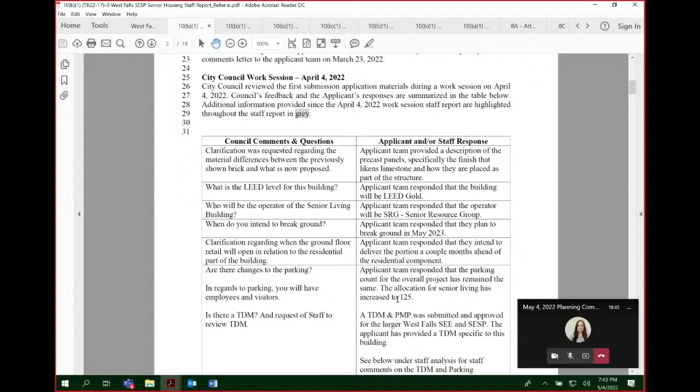There were some questions about parking, and the applicant team has provided a preliminary TDM, which is an attachment to the council staff report. I encourage you all to give that a look. Now I'm going to hop back over to the Planning Commission staff report. Background, including our staff analysis, is found in that council staff report, but I want to hop down to the application summary.

The site is Block D1, and it is part of the 9.78 acre West Falls Economic Development Project. The block is located at the northeast corner of the project at the intersection of West Falls Station Boulevard and Mustang Alley. For building and uses, we're looking at a mixed-use building with a maximum height of 15 stories and about 267,900 square feet comprised of the following uses.

260,000 gross square feet of residential use and a maximum of 212 homes, broken down into 22 memory care studio units, 58 assisted living units, and 132 independent living units.

And then we have 7,900 gross square feet of ground floor retail. The ground floor will include 2 retail bays, a restaurant, a kitchen, and amenity spaces. Floors 2 through 15 is the residential use, which includes amenity spaces and building staff offices.

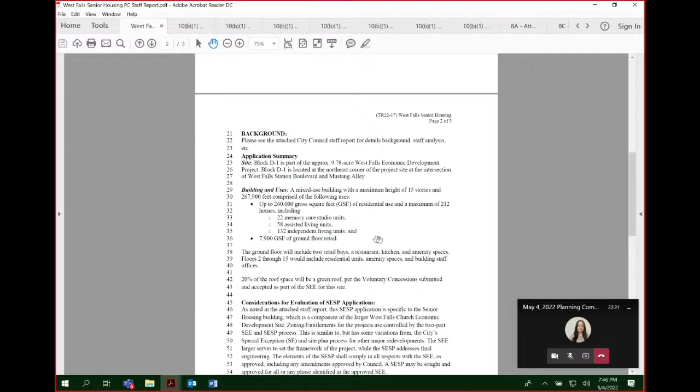On line 66 of the staff report, the SESP process is intended to result in approval based on recommendations from staff and boards and commissions, specifically Planning Commission, and considerations used in approving site plans, which includes required application elements as specified and required considerations as specified in section 48-1141. SESP applications are considered against the special exception criteria.

This is noted in the council staff report. On line 73, we have our guiding documents that staff uses to evaluate special exceptions and site plans. Those are the comprehensive plan, our small area plans, our design guidelines, our streetscape standards, the zoning ordinance itself, and other applicable city codes.

Also want to note fiscal impact. The FIA is going to be carried over from the approved SE application, as the change in unit count and mix hasn't really adversely affected it.

I want to touch on our timing really quick. Right now we're with you guys on May 4th having a work session. We intend to come back for final action, our public hearing and action, on June 1st. In between, we'll be going to the AAB on May 11th and the UFC on May 19th. The EDA just saw the application last night. We're looking for a city council second reading and final action in early August, specifically August 8th.

Perkins Eastman is our architect who will be speaking after I tee up the application and make a few high-level remarks. We also have Trammell Crow, who is the developer of the senior housing building, and Walter L. Phillips on the line as well, our civil engineers. If you can advance to the next slide, please.

So as Emily had mentioned in her staff report, the senior housing building is located on Block D1 of the West Falls Development Project. This first came before the city for approval in 2019, and there was an amendment, as she noted, in 2021.

Those approvals established very high-level development guidance for this block and for the remainder of the development, setting minimum and maximum ranges for criteria like density, building height, use, and setting out the street grid, etc. With respect to building D1, there was conceptual approval of the development statistics, but no actual architectural design approved, no detailed design drawings associated with the building.

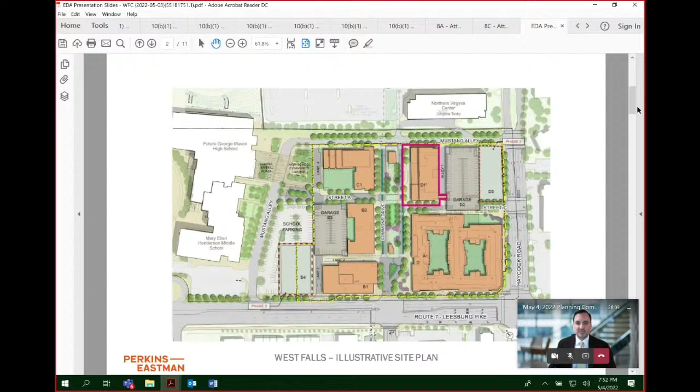So that is the application currently before the city that we're advancing at this time, and an SESP application which fills in those gaps and provides information about the actual building design. Next slide, please.

This chart shows where we started and where we are today. I won't go through every single number here; this is more for everyone's reference. But generally on the far left, you can see the minimum and maximum ranges established for the senior housing building. In the center column, you can see the most recent conceptual approval from August 2021, and the building that was sort of approved on paper, but without an actual design to go with it.

And finally, on the far right, you see the current development statistics. These have continued to fluctuate a little bit as we move through the process, so what you're looking at is more of a snapshot in time. We do anticipate final development statistics ready for our upcoming resubmission, so that when we come back before you for your action hearing, you'll have the final design and these statistics will be more locked in.

In a moment, I'll turn it over to Perkins Eastman to show you the building and the final design. But I just want to note that what you'll be seeing is primarily architectural images, and you won't be seeing too much about the streetscape, ground plane, or public realm. The reason for that is these elements of the approved entitlement really haven't changed from the original 2019 approval and the subsequent 2021 amendment.

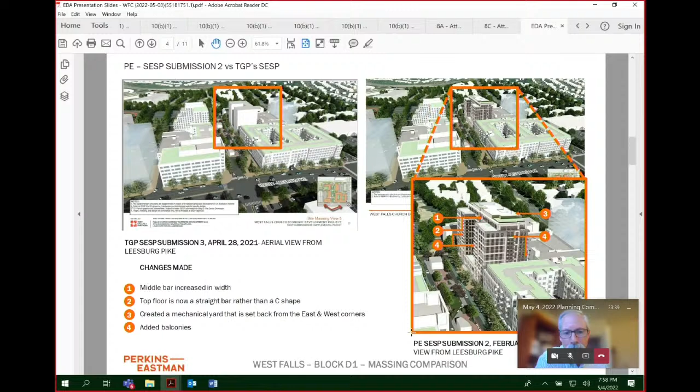The next slide essentially looks at the building from the other direction. This is basically from the Virginia Tech building across Mustang Alley, looking up Commons Drive at the other side of our building, and really just pointing out the same four changes to the building as they compare to the original SEE. Very consistent with the previous approval and very consistent with the scale of the condo building across the street. Next slide, please.

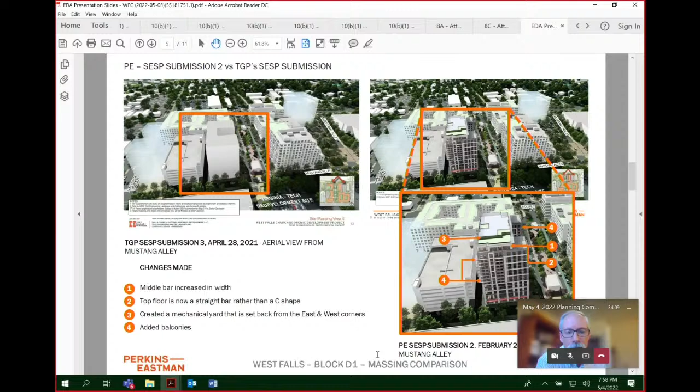When we first came to the commission asking for approval of an additional 35,000 square feet, the building we proposed is shown on the left. Although the mass of it is very similar to what we're talking about today, the materiality was different. We had conceived of this building as a red brick building with buff-colored brick, and that was the imagery we proposed. As we went through the development of the design and started looking at other issues such as construction durations and maintenance, we determined that we would prefer to make the facades of the building out of architectural precast, for a number of reasons.

We think it's actually a more handsome building. The precast panels are large in scale and they're hoisted up and welded in place very quickly. That's going to allow us to erect this building much quicker than if we hand set thousands of brick on scaffolding. That's a benefit to the neighborhood because our construction operations will be shortened, and the noise and disruption will be minimized.

We also made a change of color, mainly because architectural precast really looks better in earth tones and grays than it does in reds and browns. So the building on the right, which is where we are today, is an architectural precast building in two shades of gray, as opposed to a brick building in red and buff.

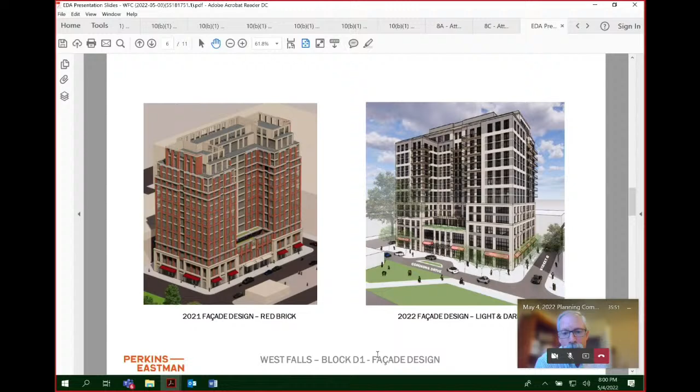Next slide, please. When we had our work session with city staff about 10 days ago, one of the things they asked us to do was add other perspective images showing the building from other locations. So this shows the building in its precast form, in the gray colors, from both ends of the site, and you can start to catch what we refer to as the rear facade, the facade that backs up to the alley and faces the parking garage. You can see that in sort of acute form here.

The final development of the building is represented in the next images. So here you can see the building fully rendered with all the shade and shadow and depth that we intend to provide.

The two little biscuits, as I call them, in the middle are actual material samples of the precast. They give you an idea of the fineness of the texture — it's almost like limestone. There are two colors of gray, and two planes to the building as well. The light colored plane sits forward and the dark colored plane sits back, and that gives a lot of shade, shadow, depth, and movement to the facades.

Then you have the balconies, surrounded by glass railings, which provide a third material that gives the building a horizontal read. We've broken the verticality of the building up into multi-floor chunks — you can see that especially at the base of the building, and in the independent living units where the balconies are, you can see the two-story read. All of that is intended to bring the perceived height of the building down to a more human scale.

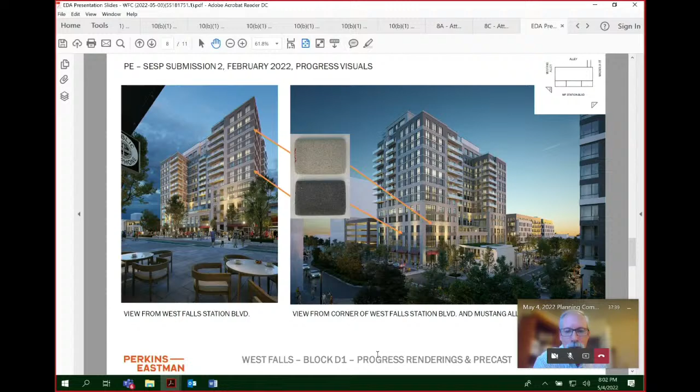In order to understand how the building functions, the next couple slides have floor plans that I'll walk you through quickly. Starting at the ground level, where one would enter the building — the lower left diagram — we enter right in the center on the axis of the building. It's a very symmetrical building. Our entrance, where the yellow is, is the front door to the independent living, senior living building.

You come in there, and everything to the left is part of the senior living program. The pink colors are living rooms and amenity spaces, with a large restaurant on the end of the building facing Mustang Alley. In the back, on the alley, the gray spaces are the kitchen, and the purplish areas are the shared loading dock and shared trash room. On the right side of the page, the aqua or blue-colored spaces are the retail spaces, which could be subdivided into one, two, or three different spaces. That's what happens on the ground floor.

Going down to the basement — the top diagram, which is all gray and yellow — down there we have a variety of service spaces: utility entrance rooms for electric, water, fire, gas, and telephone. All those service rooms are down there, as well as bike storage for both retail and senior living use, and staff spaces as well. So this is all service and support to the retail and to the senior living building.

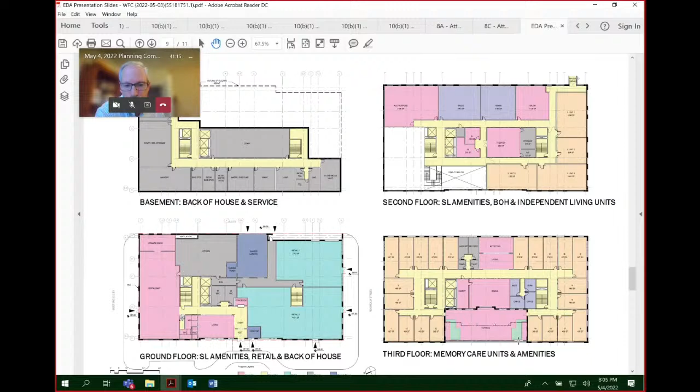Going upstairs now, we'll go to the next slide. Now we enter the realm of assisted living. On the fourth floor—the upper left diagram—we have our first floor of assisted living. The pink spaces are all the amenity spaces supporting this floor as well as the 5th and 6th floors, which are primarily assisted living residential units. The gray and purple are back-of-house and support spaces.

We also have a small balcony terrace that runs across the top of the memory care terrace below, accessible from the assisted living dining room, available as an outdoor space for assisted living residents. The units on this floor, as well as the fifth and sixth floors, are a combination of studio and one-bedroom units. On the fifth and sixth floors, which are identical, the larger units are one-bedrooms and the smaller ones are studios.

As we move further up the building, this is independent living, shown in the top right diagram. We have 16 units per floor, many with balconies, all one-bedroom and two-bedroom units. All floors are identical—there are 8 of them—and then finally we cap the building with our penthouse level, the 15th floor, which is another amenity space.

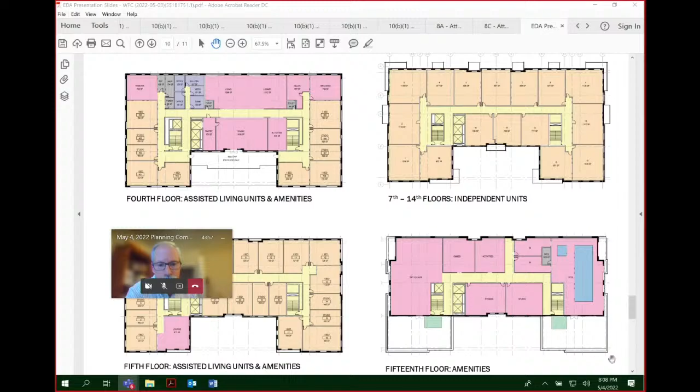On top of the penthouse level, we have our mechanical yard and green roof—a traditional vegetated roof—all of which works to satisfy the stormwater management requirements for the building. The last page has some tabulations, which have all been restated on the first page that Mr. Allman talked about, so there's nothing here we really need to cover. That's the architectural design of our project.

Okay, I guess before we move on to other topics, are there any questions on the architectural design? Any questions or comments from commissioners on that aspect? Ms. Coleman, I see your hand popped up.

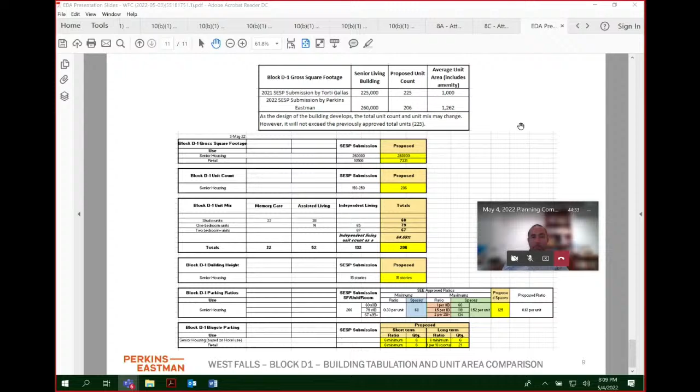Thank you. I did have one question about the bridge to the garage. I was wondering if you could talk a little bit about that and how you chose where to locate it, and where it is located on the garage levels and how that relates to where the parking is.

It is in a location where it ties to a landing and the elevator core in the garage, so it's a quick trip to get from your parking space down the elevator and across the bridge into the 2nd floor of our building.

And just to further that, most of the senior living parking spaces are clustered around that landing. There are some on a different level, which is where the elevator comes in.

Got it. I thought they might be on the 2 levels above where the bridge was located. I was curious about, it's not very close to the elevators. I was just curious about why it was sort of at that end of the building, on the right side of the building, I guess I'll say.

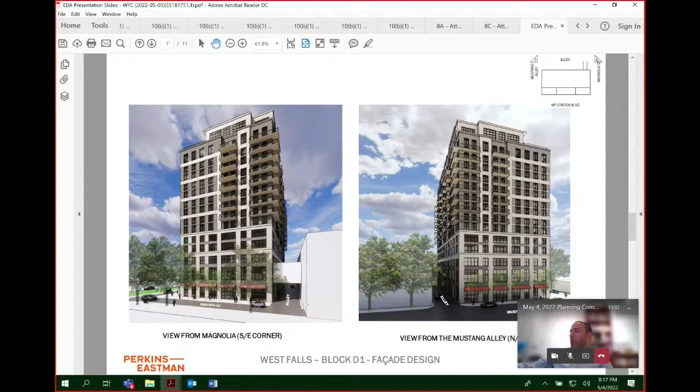They do, sir. There's a large rooftop terrace, about 30 by 70, 30 by 80, right there. It's all outdoors and secured so there's no chance of them falling over. Right, I mean for those folks, having some outdoor space that they can safely get outside to is important and good.

I also see - so would there be the ability for them to walk around a loop of the floor there too, potentially? I know in some other memory care type settings, they've designed outdoor but contained walking paths that give them the ability to move around and walk, but it seems like perhaps there's some of that here. I know there must be facilities like this in more dense urban places - there has to be, and it's good that there is. But I was curious how you deal with that part of it.

Well, we do have the loops, sir - both the yellow corridor network loops, and it loops also into the exterior courtyard. We haven't shown a detailed design for the exterior courtyard, but it will also have a loop as well. I'll also say that a building just like this is really where we see a lot of the market going into walkable neighborhoods in an urban context, and a stacked building like this is becoming more and more common in many, many cities across the country.

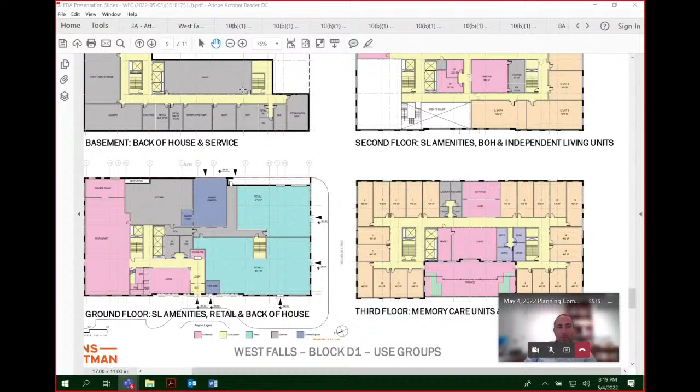Thank you. All right, any other questions for the architectural elements here? I guess I'm not seeing that, so I don't know if the applicant was going to discuss any other aspects. I know city staff commented on some other issues related to transportation and environmental issues. I don't know if there was anyone else who was going to hit on those aspects, or if we just want to open it up to commissioners to have at it on other topics.

Mr. Stevens? Yeah, I can go ahead if it's appropriate. I did have some comments on one fiscal item, but then the rest of it's, I guess, on the environmental side.

Before I get into the fiscal thing, I'll just add my 2 cents that I liked the change from the brick to the architectural precast. It does give it a more modern look, and I think it fits in nicely with the condo building across. I also like the addition of the balconies.

So thank you for that. First question has to do with the fiscal side of this, and Mr. Fuller, you may have enough institutional memory to recall this: going back to when the city approved the Kensington, another senior care facility, there was a lot of discussion about a supplemental payment, a way to come up with a value for the building. The thought was you couldn't rely on a traditional income approach, so they had a basket of about 10 properties to develop a basis for the valuation. Now, it may not be relevant here because there's an overall comprehensive agreement that takes care of the fiscal aspect, but I'm curious, Gary, whether you recall that discussion on the Kensington, and was there any carryover to this facility since it's a similar type in concept?

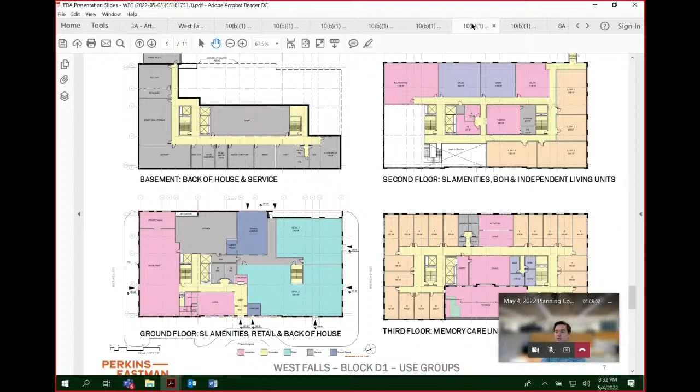The reason we were comfortable with the difference between 125 and 150 spaces is that this is a very metro-accessible site, and we anticipate a number of our lower wage workers, servers, and some care staff will be taking metro to and from the project every day. I think a TDM plan in this location will be far more effective than at the Kensington. The Kensington's not too far from metro, but that wouldn't be my preferred commute every day. So that's our rationale for the number of spaces, and a real-world example of how we got comfortable with it. Overall we feel very good about the parking — I think we're going to use it all, but we're adequately parked.

In terms of the SCSP approval on the parking, was there a breakdown by residents, employees, and retail? Or can that be provided — what was approved — just so we have a breakdown and understand it? Yes, happy to provide that.

That would be fine for me. Thank you. And for me too — really what I was trying to ward off is that we're not going to try to build additional parking here because of something happening at the Kensington. So I'm happy with that answer. That sounds great, the TDM plan is good. Respectfully, I think there could be a little bit more. I'm glad there's a parking cash-out element to that — I think that's very smart, especially for this particular building.

I don't think we have to answer it here, but as you all know, TDM plans will often have a transportation coordinator to provide alternatives and help ameliorate transportation challenges. With this particular complex of projects, it seems like a transportation coordinator for the whole enchilada probably makes sense. I don't know how that happens — I don't know if we talked about it here, or if it happens differently for other buildings — but it clearly would make sense here. Really appreciate the answers, thanks very much.

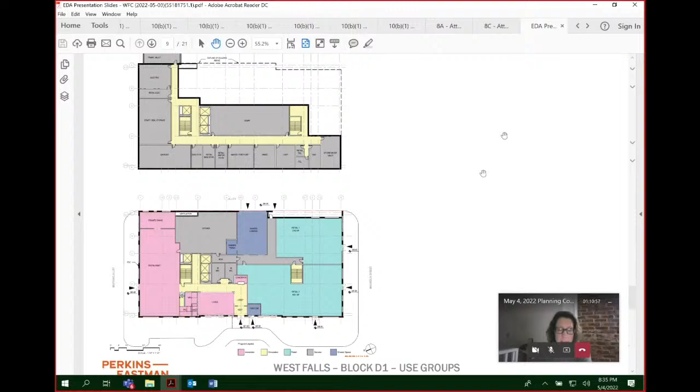Certainly appreciate the perspective, and I hope we can avoid any teen-senior conflict. The retail is going to be built by Trammell Crow Company, but owned and leased by FCGP. What we've discussed with them is that this will likely be no more than two tenants, but there's a very good chance it may be one, given the configuration of the retail space. They're planning a mix — restaurants, boutique fitness, services, and other more active uses for the project — and are very concerned about the overall placemaking.

We have all the infrastructure necessary for a restaurant, and given the corner location here, right across from some of the commons elements, I think that's very likely for a merchandising plan, but we'll have to talk with them to get more specific insight into tenants they've seen and their particular vision for it.

In terms of interaction between retail and the senior living spaces, we have really only one public entrance and exit from the building, which is the main lobby. So you come through the vestibule, and then you're right directly in front of the concierge desk, which will be manned 24 hours a day, and that is really the control point for managing interactions between our residents and the surrounding development.

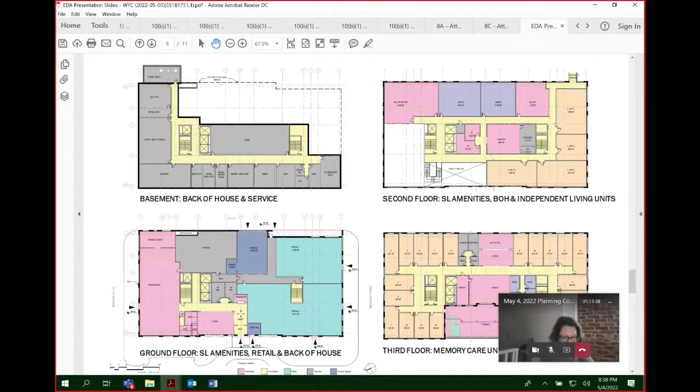I think that all makes sense. Can you, on that bottom left diagram, that little black arrow to the left bottom, is that an entrance to the retail? No, right there - that is emergency egress from the building, not a typical entry point.

Okay, so the only entrance is through that main lobby, which will feel like the entrance to, like, what, a mall, a series of restaurants, a senior living home? Like, what will it feel like? And I'm picturing my child walking home with a horde of other teenagers, as happens regularly, and they love to swarm on Starbucks or whatever happens to be in their path. Will they be swarming here?

So, this is a Class A residential project. This will look like the condo lobby across Commons. This is absolutely not going to look like a mall or a Starbucks. This is a very nice residential building. There's nothing to worry about on that front, I think, is what I would say. It's going to look like a really nice apartment building, a really nice condo building.

Okay, so a horde of teenagers wouldn't just spontaneously wander in? I think no. Okay. All right. Great. Thank you.

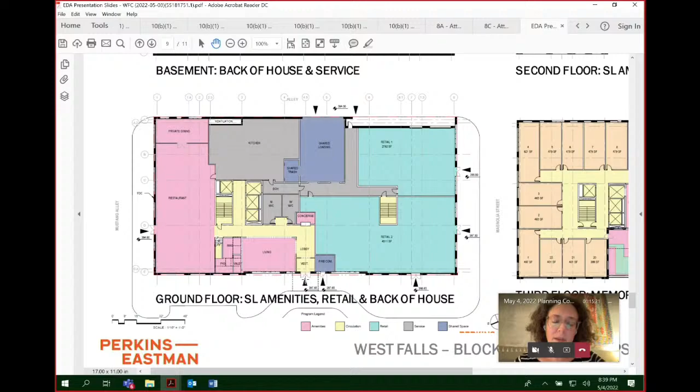Go ahead, Ms. Conlon. I just have one quick question to follow up on that. At the back of the house, the entrance - on that level, on the ground floor, at the back side of the building where the garage is, is that an entrance that's for the public, or is that an entrance that's just for back of house?

That is an emergency egress access point. Okay, so if you have residents or their visitors parking in the shared garage, they would walk around the building to the front entrance to access the building?

So if you are a resident, and you parked in the garage, you will most likely fob in through a secure door at the end of our garage walkway - that's the bridge that connects to the garage building, on the second floor. So you would fob in, and you would come in on the second floor, go to the elevator core, go wherever you want.

If you're a visitor, you would come out, walk around, and go to the main lobby, in pretty much all instances. Okay, thank you.

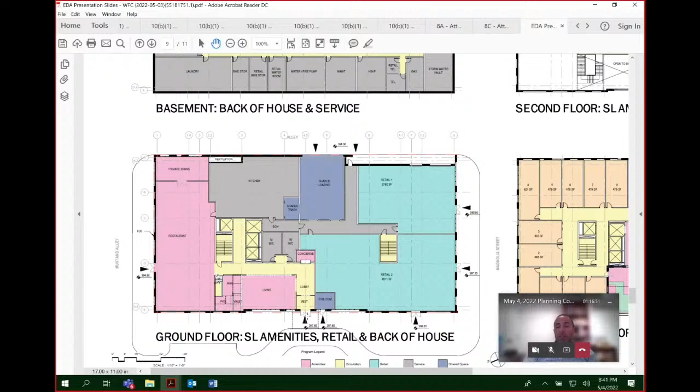Okay, any additional comments on the site plan here? Mr. Harrow, is your hand back up? Go for it. Yeah, I'm back up.

Could you just remind us again the second floor amenities? I mean, I think we kind of discussed what's on the first floor. Now, on the second floor, there's going to be some - these are not just amenities for the residents of the building, right? These are common amenities for the community as well, or am I off on that?

I've got this. So they're primarily amenities for the residents of the building, but very often the operator will have events that are open to the public. The large spaces up here, going from left to right across the top, are a large multi-purpose room, the sales and leasing offices, the administrative suite, and then a salon and spa. In the middle of the building, there are public toilets and a theater. The rest of the space is private, that would be for the residential units.

Okay, great. Yeah, I wasn't quite sure, but I guess it's more for the residents, and maybe there'll be something up there that people might access, but it won't be unless you're going for a certain specific thing. So again, we won't have the high school kids trying to go up there and access anything.

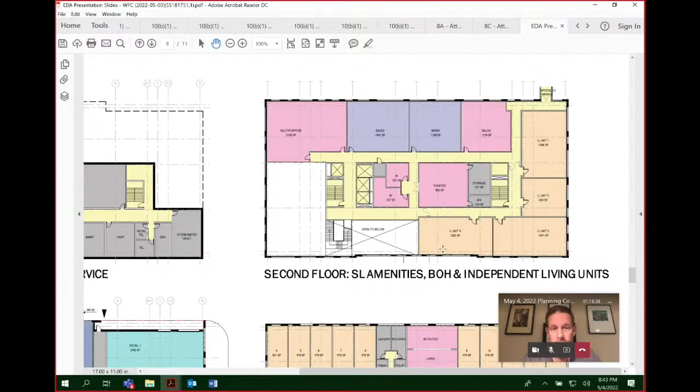But I would just say, William, I think you did a good job of explaining to Ms. Weiss about what it was going to be like to enter, and it's clear that this is going to be Class A, luxury. The tenants you have in this building are going to be paying a premium, and they're going to be wealthy.

But I really think it is important, you mentioned how it'd be great that some of the residents will be going to football games, and I'm sure many of them are going to go out and run and walk and use the track, and use sort of the public spaces of the high school.

But I think it's really important to think about this entire area and how you're going to have multiple, there are going to be packs of teenagers walking through, no question, at certain hours. So how you handle that, they are going to be interacting with your residents.

And I think to be very proactive and think about inviting students, or having programming, just making sure that this building isn't seen as something totally separate from what's happening at the high school, I think is really going to be important, so that it isn't just a security guard outside that basically pushes kids away as they come out of school.

It's something else. And I really think that's important, because in communities you have conflicts along racial lines, income lines, but also age. And knowing that you have these two vastly different age ranges in this space, which is actually kind of a tight space, it's going to be important for you to have relationships with the high school, and for the high school administration and the students having relationships with your building operators and also your residents.

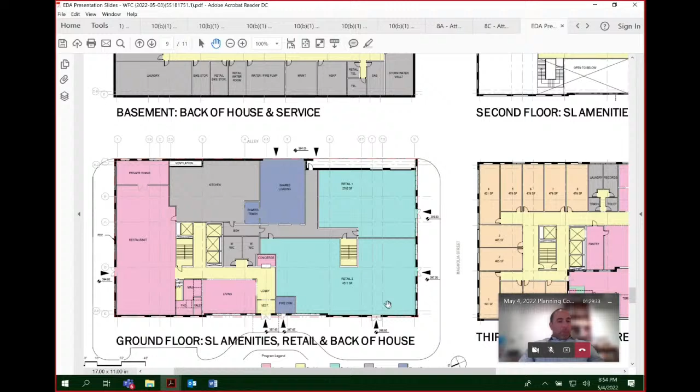Okay, so if there's not anything else, and I'm not seeing anybody else, I guess we'll thank the applicant team again, and we'll see you again in a few weeks on the 1st of June, I think, is the tentative schedule. And we'll take this up again at a public hearing for a recommendation at that time. Okay. All right. Thank you. Thank you again. Thank you, everybody.

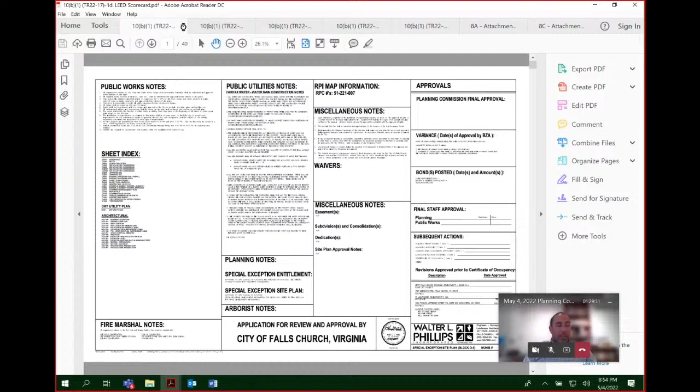So moving along here, that takes us through our work session, brings us to item 8, information items. Before the director's report, are there any planning commissioners' reports they'd like to share?

And I know there was an attachment on the, if I can pull it up here. Too many screens open. Let's see, was this something from the planning commissioner? Yes, did someone want to run through this Alexandria affordable housing brief? Mr. Chair, I sent that in.

I just thought it was an interesting piece on, obviously it's here in the region, and in Alexandria, showing not only does the affordable housing that they analyzed not decrease property values, which is a concern for a lot of residents, but it actually showed a slight increase. It's a complex report, filled with regressions and things like that, but the final conclusions are pretty interesting. So if folks don't want to read the numbers, maybe just the beginning and the end. It's most parts.

No, it seems, it's great to see somebody actually, because of course that's one of the concerns that's often levied, or maybe not against, but that's brought up in relation to affordable projects, and to have somebody objectively and quantitatively looking at the data, to see what actually does occur, especially here in the region too, to have it be a local example is even more valuable in helping to make the argument and to help dispel certain concerns that folks have that may not be well founded when you look at the data like that. So that's really interesting. And thanks for sharing that.